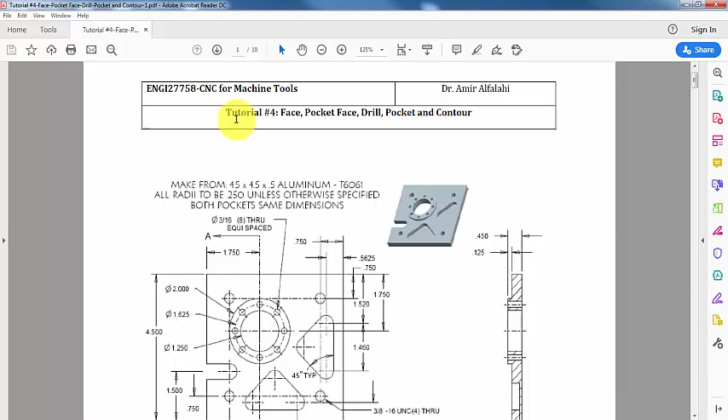In this video lesson I'm going to machine the slot with a 0.375 diameter flat end mill. The slot will be roughed and finished using multi-passes and depth cuts. This slot is ½ inch wide, so using a ½ inch diameter flat end mill would not allow us to rough the slot. So let's get started.

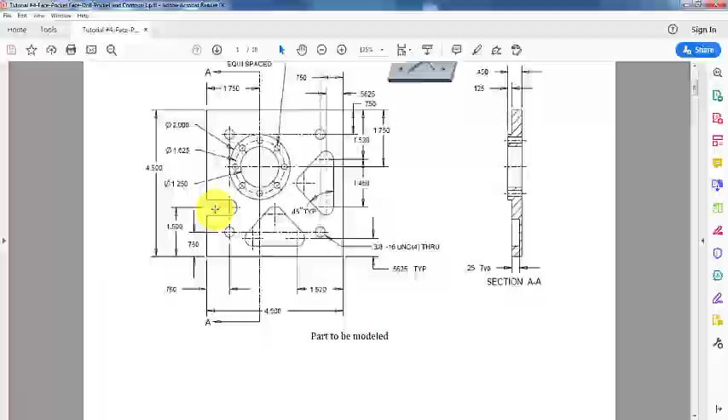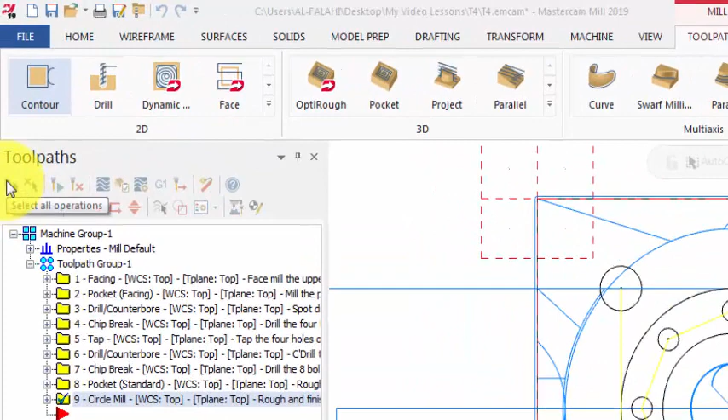Alright, so this is our part, and as you can see so far we have completed 9 operations. So what we want to do in this video is to rough and finish the slot here. So before that I'm going to hide the toolpath lines. To do this I'm going to select all operations and then click on toggle display on selected operations to turn the toolpath display off.

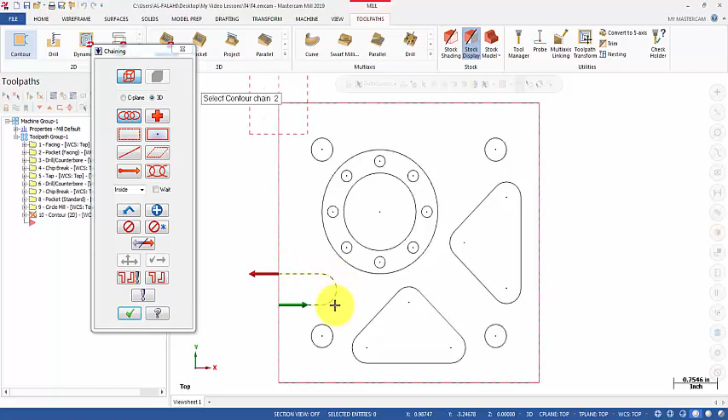Now we go to toolpath and then from the 2D section I will select contour. So the chaining dialog box will show up with chain set and the message on the screen is select contour chain 1. So we click on this line here and as you can see the profile of the slot has been chained successfully. So we click OK to proceed with the rest of the parameters. Now toolpath type and contour is set.

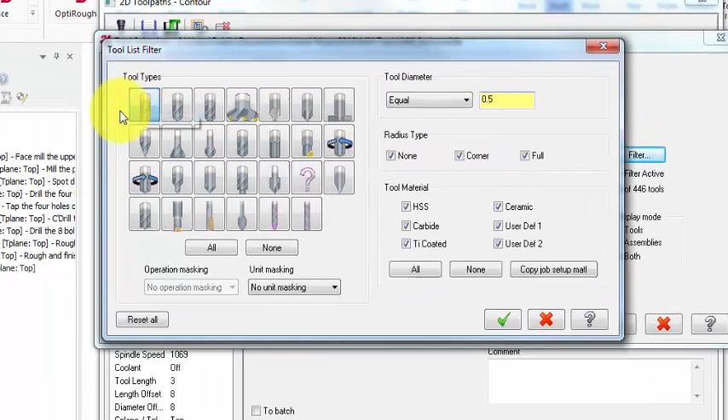We click on tool, then we click on select library, and using the filter what I am after is a flat end mill of diameter 0.375. So I'm going to change this to 0.375 and we click OK. So that's the tool that we need for this operation. Select the tool and click OK.

So this is tool number 9, length offset H9, diameter offset D9, spindle direction clockwise, spindle speed I'm going to set it to 3000 RPM, the feed rate maybe 8 inches per minute, likewise plunge rate 8 inches per minute, and I'm going to activate rapid retract. Then I will add a comment. So we can say rough and finish the slot.

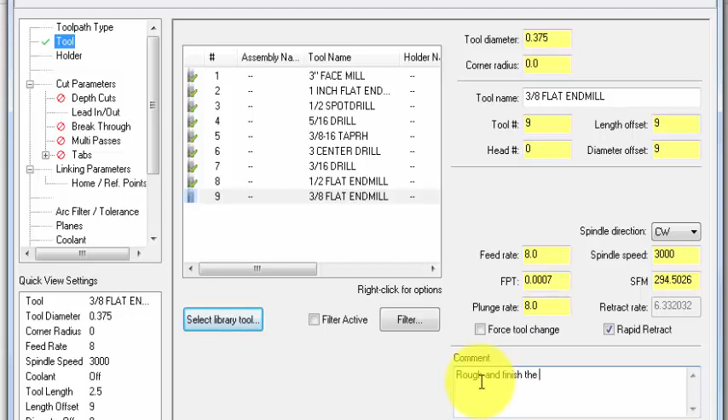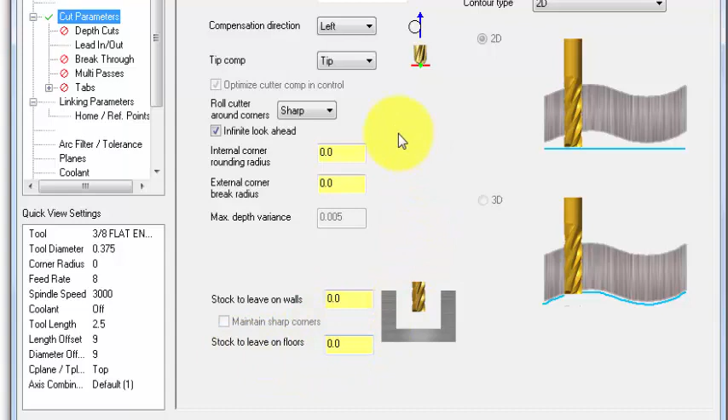Then we jump to cut parameters. On this page, just make sure that the contour type is 2D. Okay, and also we don't like to leave any material on walls or floors. So stock to leave on walls 0, stock to leave on floors also 0. So nothing to change on this page. We go to depth cuts and I'm going to activate depth cuts and I want to make the maximum rough step 0.125. Also I want to keep tool down.

Lead in, lead out. I'm going to deactivate the lead in, lead out in the entry and exit section, but I'm also going to activate the adjust start of contour. So currently it's set to shorten. I'm going to set it to extend and the length value is 100% of the tool diameter, so that is 0.375, and then I'm going to copy this to the exit section as well. That's all we need to do on this page.

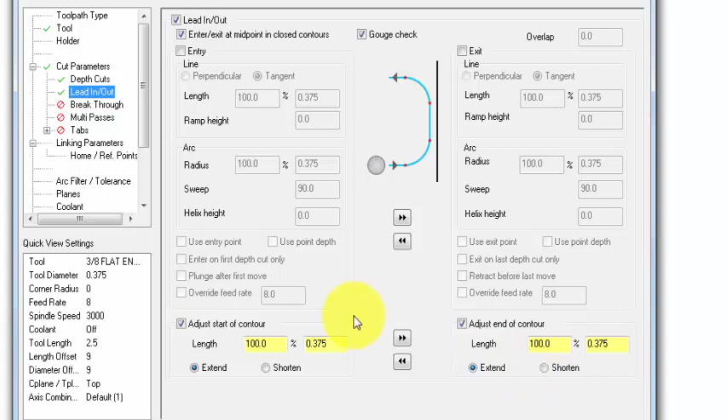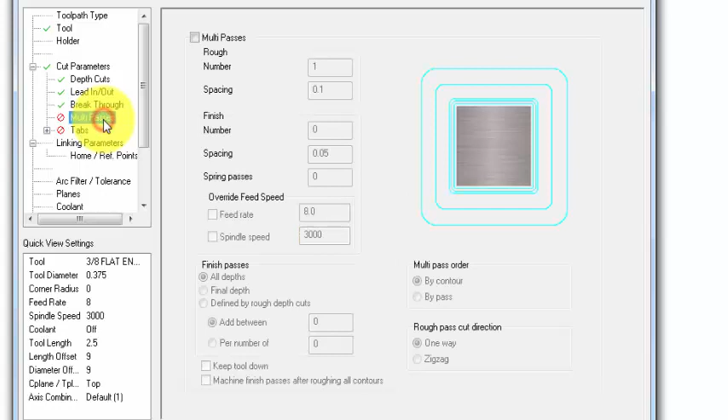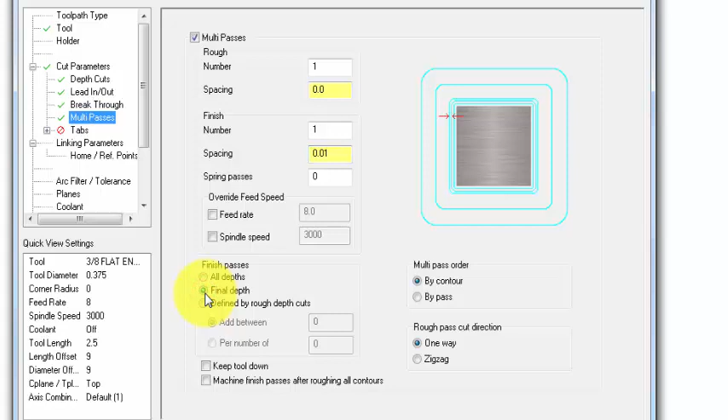Then breakthrough, yes, I want to activate a breakthrough and I want to set the breakthrough amount to 10 thou so that we make sure the tool will go below the bottom face of our workpiece. Multi-passes, I'm going to activate multi-passes. So rough number 1, spacing 0, but I want to set 1 finish pass. Spacing, we can set it to 10 thou. Also, finish passes to be accomplished only at final depth, and we want to keep tool down.

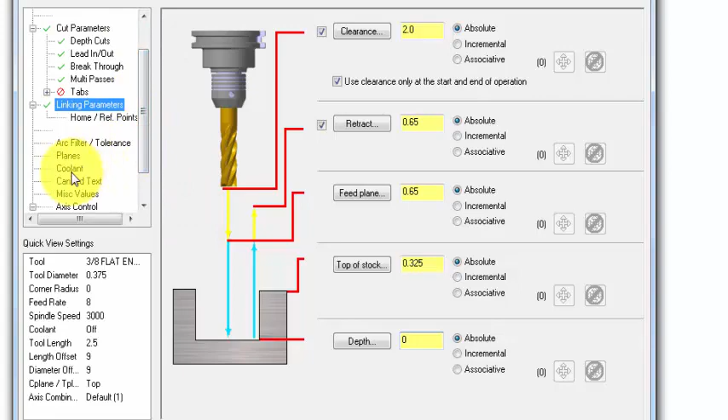Linking parameters, clearance 2 inches absolute, use clearance only at the start and end of operation. Retract set to 0.65 absolute, that's perfect. Likewise feed plane 0.65 absolute. Top of stock in this case is 0.325 absolute, and for the depth we set it to 0 absolute. Also, I'm going to activate the coolant. I'm going to turn the coolant on. And then we click OK. So that completes this rough and finish of the slot operation.

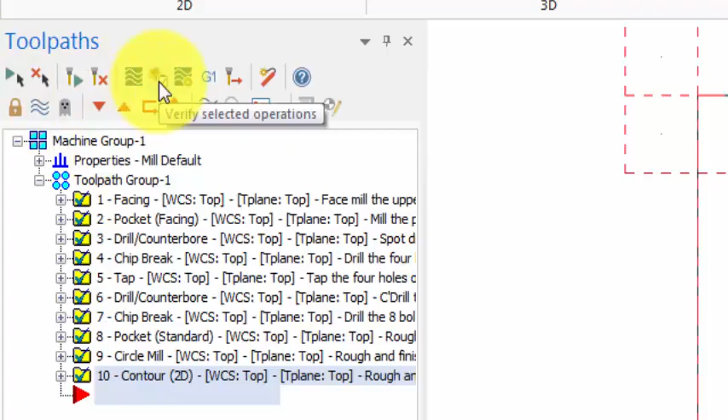Now let us verify all operations. So I'm going to select all operations and then verify selected operation. So here we are. I'm going to toggle to isometric view. So right click and then select isometric. And our setting here, stop condition is at operation change. I also activated the verify color loop so that each operation will be given a different color. So now we can play.

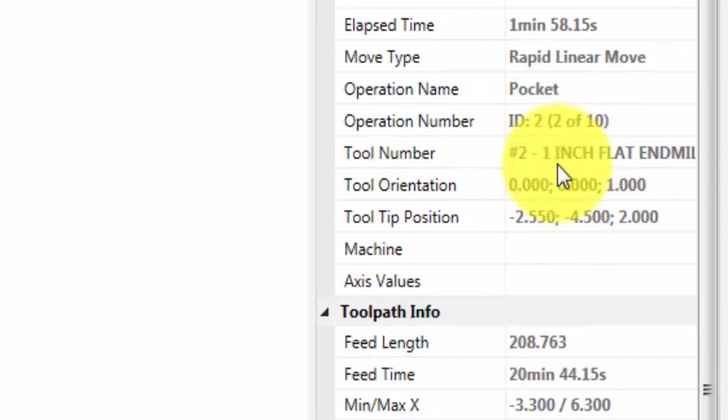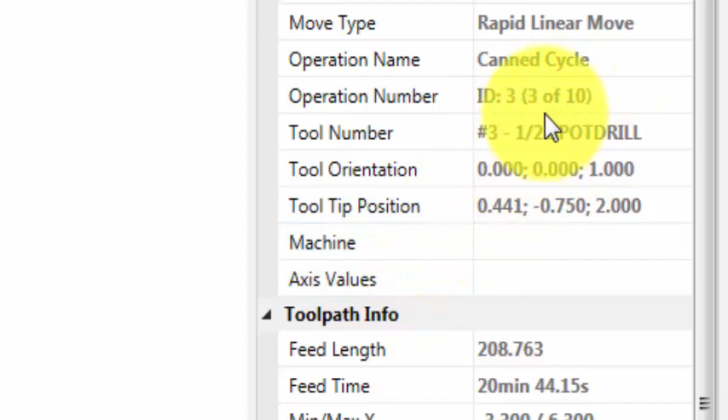So the first operation is facing, and as you can see, we are using a 3 inch face mill. That's the facing operation. Then the next operation is the pocket facing, and in this operation we use a 1 inch flat end mill. The next operation is the spot drill, and as you can see we use a 1/2 inch spot drill to drill the threaded holes. Then we have tap drill. We use a 5/16 drill to drill the holes prior to cutting the thread.

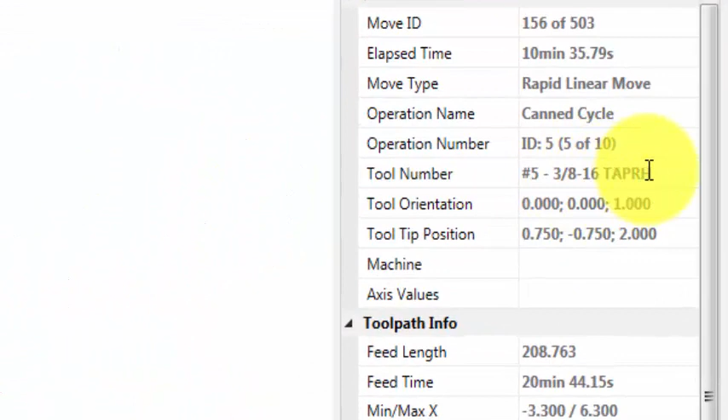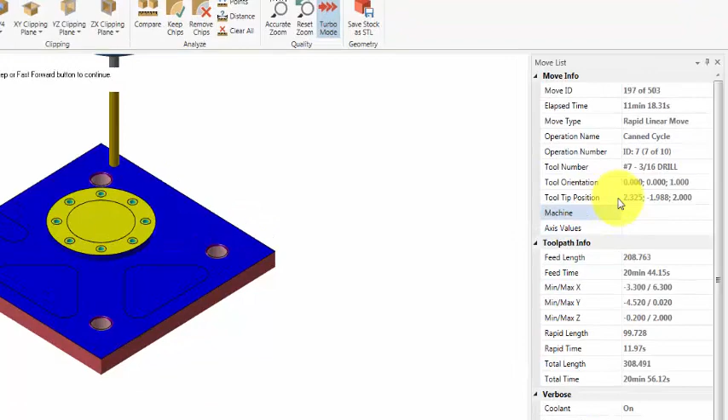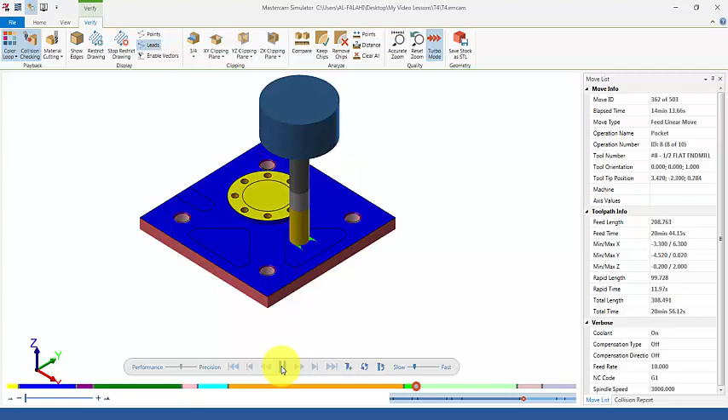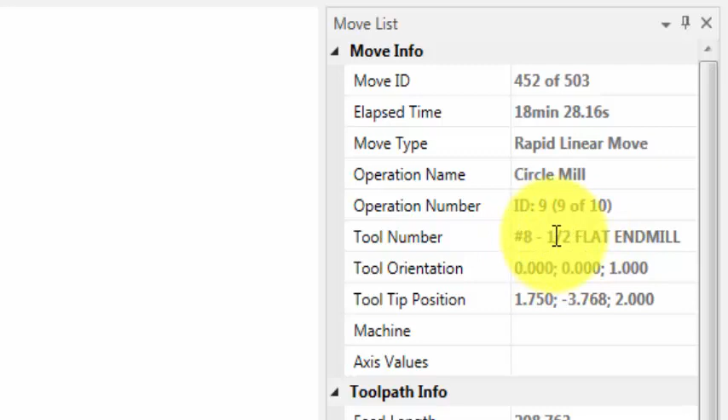Then we have 3/8-16 tap right hand. Then we use center drill to center drill the 8 bolt hole circle holes. Then a 3/16 drill to drill the holes. Then we use the 1/2 inch flat end mill to pocket, or to machine, the triangular shape pockets. After that we use the same tool, the 1/2 inch flat end mill, to circle mill the central bore. Then finally we use the 3/8 flat end mill to rough and finish the slot.

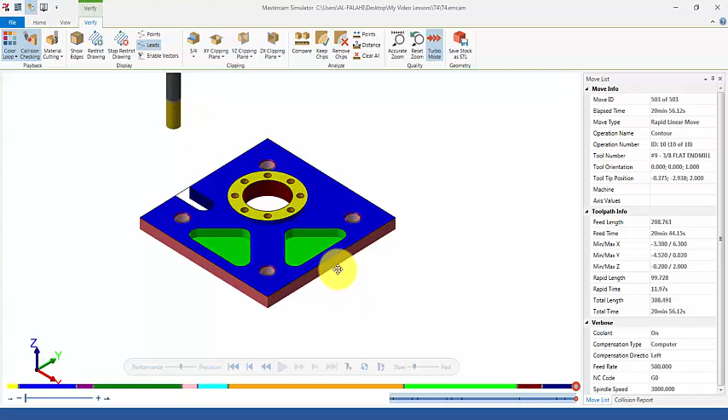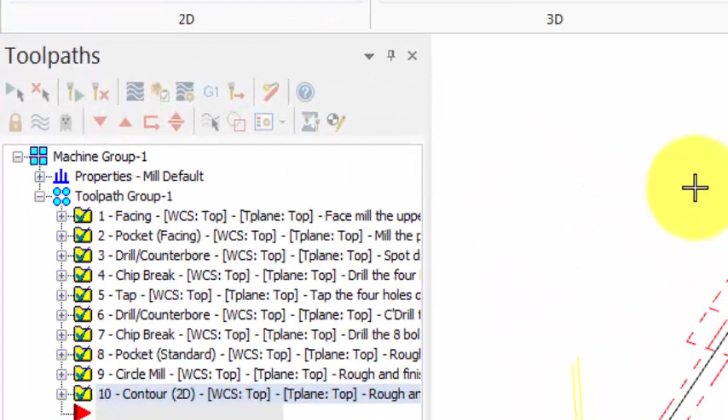So that is all for tutorial number 4. As you can see, all operations are completed. Now I'm going to close this simulator, and the last step in this tutorial is to select all operations and then generate the G-code. We save the file with a meaningful name, for example T4 tutorial 4.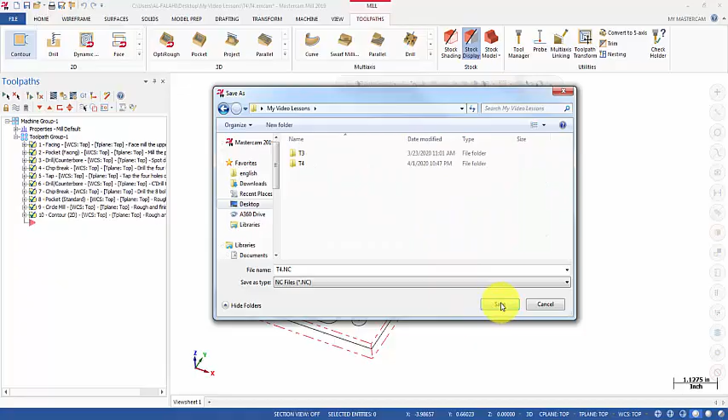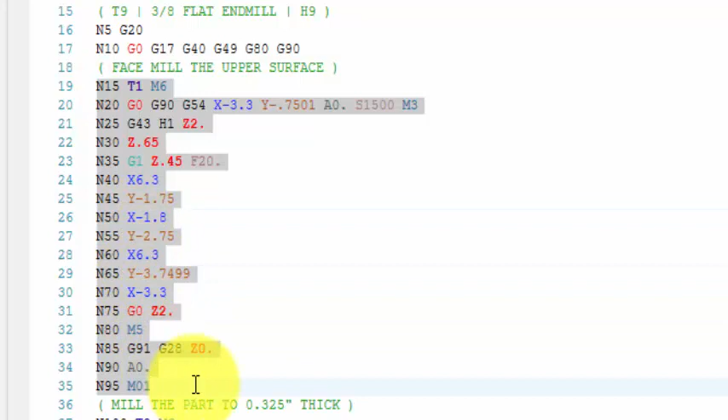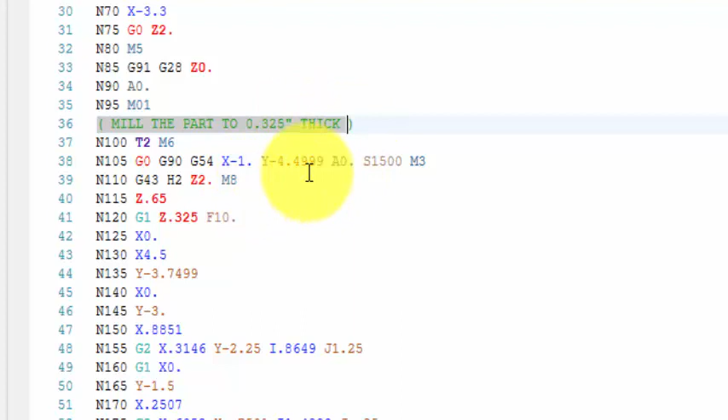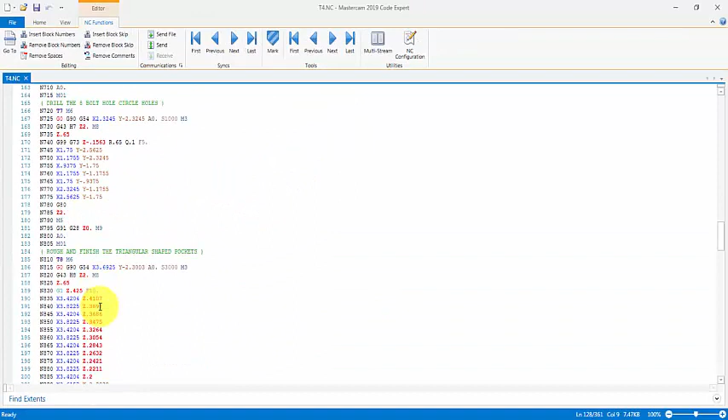Here we are. This is our G-code that we can use to machine the part. So as you can see, this is my comment: face mill the upper surface. So these blocks define the necessary steps to machine the facing operation, and that's why I always encourage you to add comments. You see this message: mill the part to 0.325 thick. So these are all the blocks that we use to cut to that thickness. Then spot drill. These are the blocks for spot drill operation, drill operation, and so on. Looks good. So I'm going to close this file.